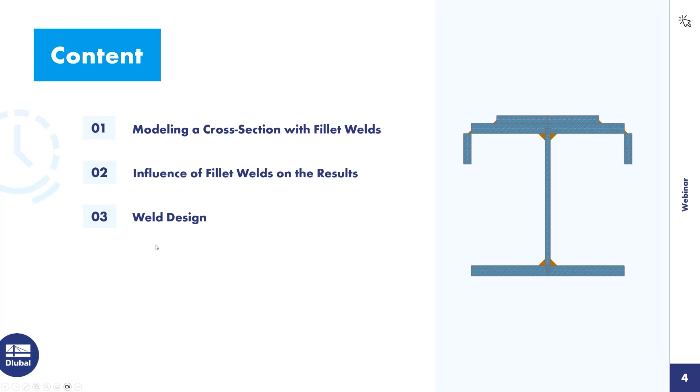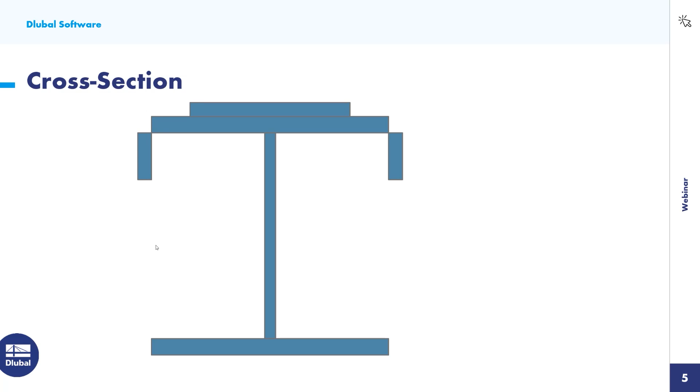The presented I-section featuring a welded reinforcement and welded lips on the top flange will be modeled in RSECTION. During this process, the types of fillet welds available in the program will be introduced. The throat welds are modeled using a standard fillet weld. The connection between the reinforcement plate and the flange is created using a lap fillet weld, while the lips are attached to the flanges via corner fillet welds.

To begin, I create a new file in RSECTION. I name this file example1. Since weld stresses can only be calculated using the analysis method thin-walled analysis, I select this option. For the material, I choose steel S235. This material is already inserted in this file, but if you would need another material, you can choose this from the material library.

I insert the I-section to be modeled from the cross-section library. I use the section type parametric thin-walled since this section type allows me to define the parameters of the cross-section manually. For the welded cross-section, I choose also the manufacturing type welded.

When inserting the cross-section, I disassemble it into its individual components to allow for further editing. To ensure that the force transfer occurs exclusively via the weld and not through adjacent elements, a separation joint must be defined on the welded element. Let me explain this in more detail.

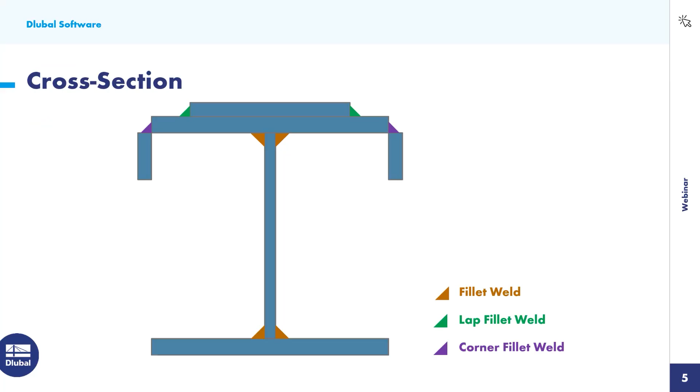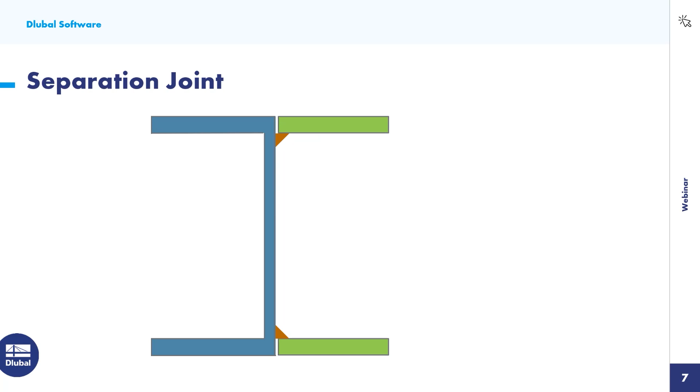In this example, the web is welded to both the top and bottom flanges. In this case, the web is considered the welded element. Therefore, separation joints must be applied at both the beginning and end of the web, in other words, at its connections to the flanges. If, on the other hand, the two right-hand flanges were to be welded to an existing section, the separation joints would need to be defined on the flanges, as they would then be the welded parts. The separation joint is defined directly within the corresponding element.

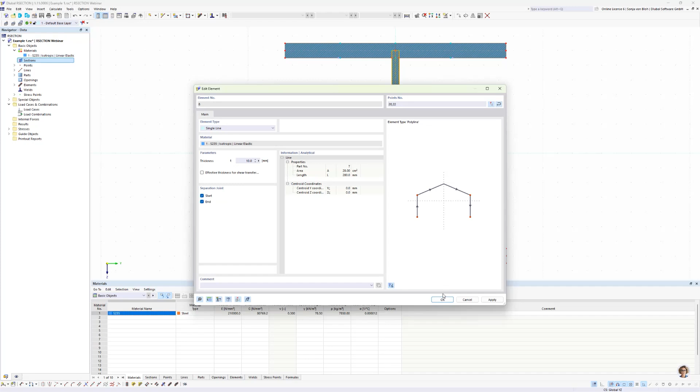In this case, I open the Edit dialog of the web, and here I define the separation joint on start and end of the element. For verification, the separation joint is also shown graphically in the model.

Next, I define the fillet welds. For this, I use the weld type fillet weld. First, I define the throat thickness. This should be 10 millimeters. Then I select the elements to be connected by the welds. These are the upper flanges to the web and the lower flanges to the web.

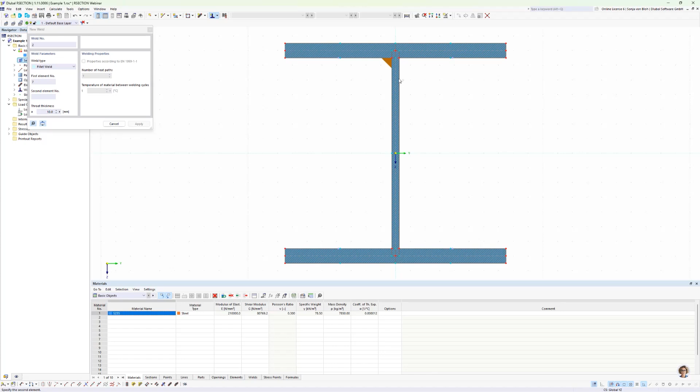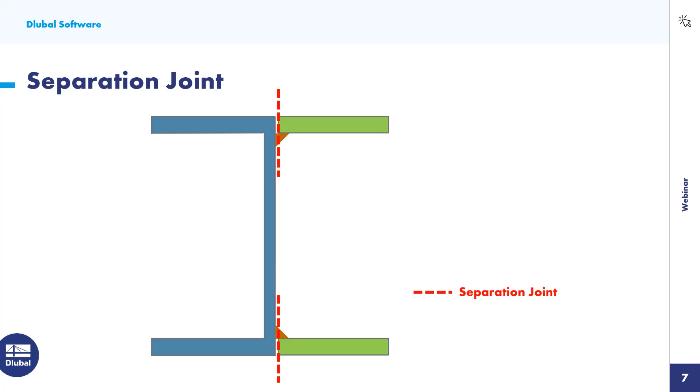The connection between the flange and the web is made via the fillet welds. I would now like to show in detail how these welds are represented. To do this, I examine the connection between the web and the top flange. The previously defined separation joint on the web ensures that there is no direct connection between the web and flange. Force transmission takes place exclusively through the weld.

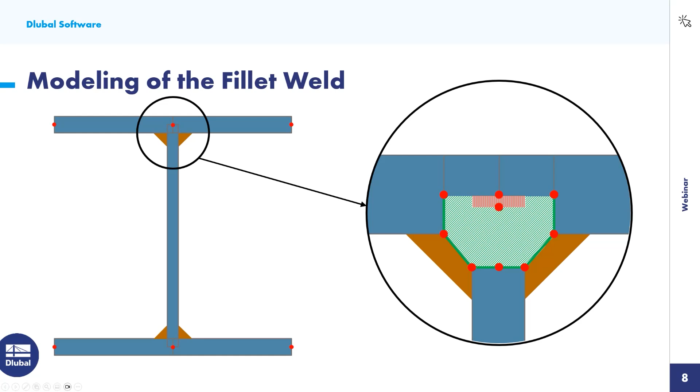For comparison, I create an additional file with identical cross-section but without welds. I name this file example2. I choose here once again the analysis method thin-wall analysis. I use the material S235 and I define the I section with the help of the cross-section library.

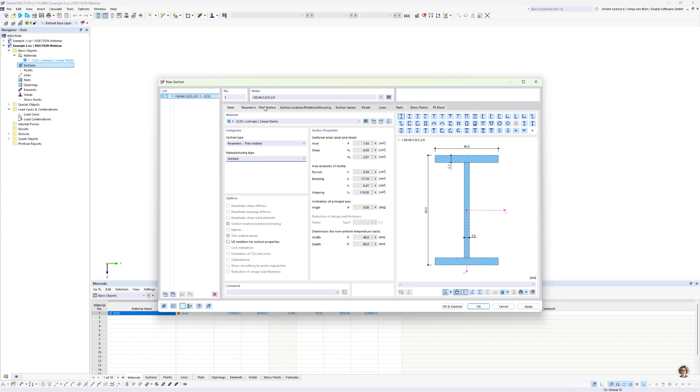Here I choose the section type parametric thin-walled, the manufacturing type welded, and I define the dimensions of the cross-section: height 300 millimeter, width 300 millimeter, thickness of the web 10 millimeter, thickness of the flanges 20 millimeter. I insert the cross-section with OK and explode.

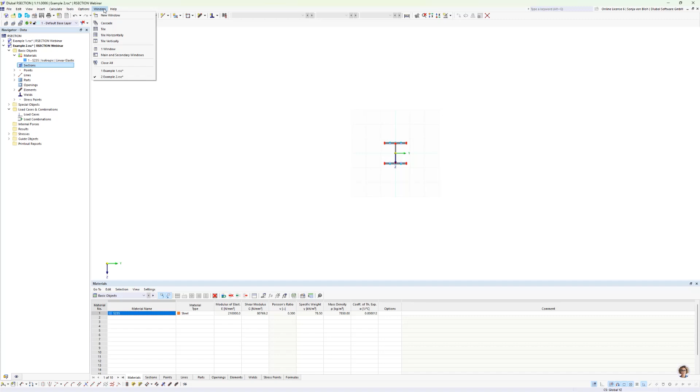To directly compare the cross-section properties and stresses, I display both models side by side, and for this I use this function tile vertically. Then I start the calculation in both files.

As already explained, the torsional constant in the file with weld is higher because of the additionally considered Bredt torsional moment of inertia. Here I have a torsional constant of 195, and in the file without welds I have a torsional constant of 162. I then compare the unit shear stresses due to torsion.

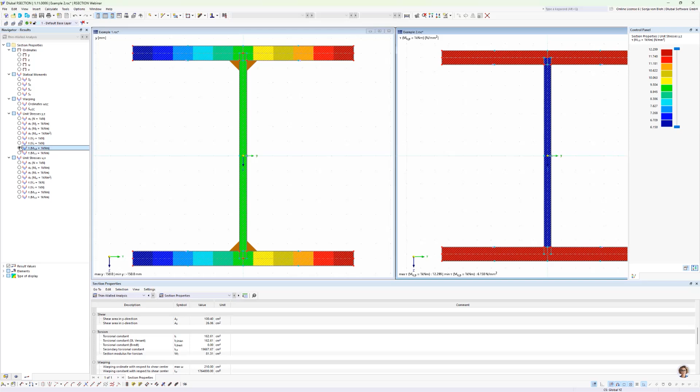For this, I activate the unit shear stresses in both files, and I choose the type of display off, and also in this file. In the region of the closed cell, due to the welds, higher torsional shear stresses are observed in the welded section, while lower stresses occur in the remaining areas of the cross-section.

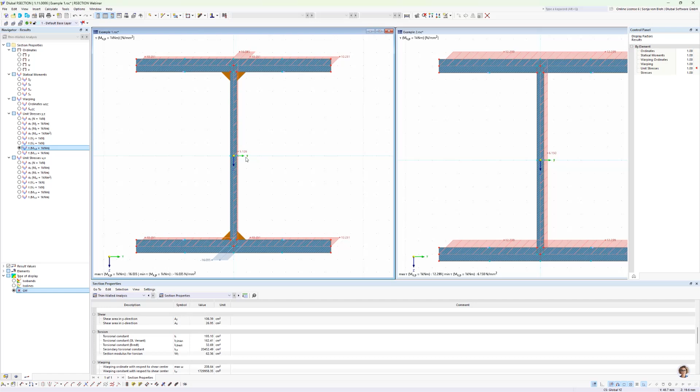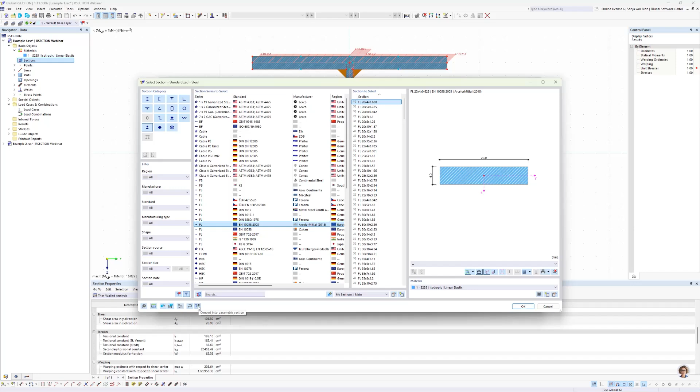To further reinforce the I section, a flat steel bar is welded to the top side of the flange. I select a flat steel profile from the section library. For this, I open the navigator data and insert a new section, a flat bar. I want to define the dimensions manually, and I define a width of 200 millimeter and a height of 50 millimeter.

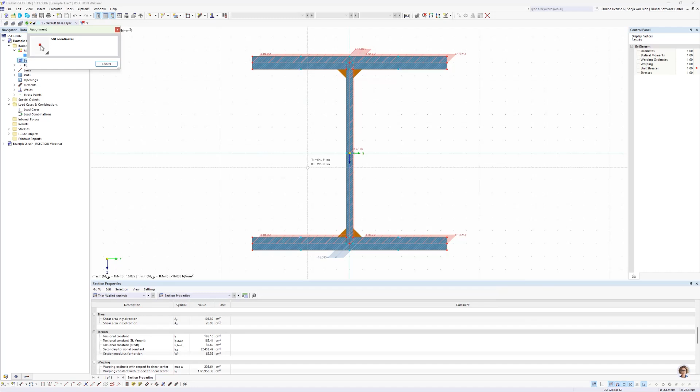In the graphic preview, I set the center of the bottom edge of the flat steel as the reference point. I then select the insertion point in the working window, which corresponds to the center of the top flange. After confirming with OK and explode, the flat steel bar is placed centrally on the top of the flange.

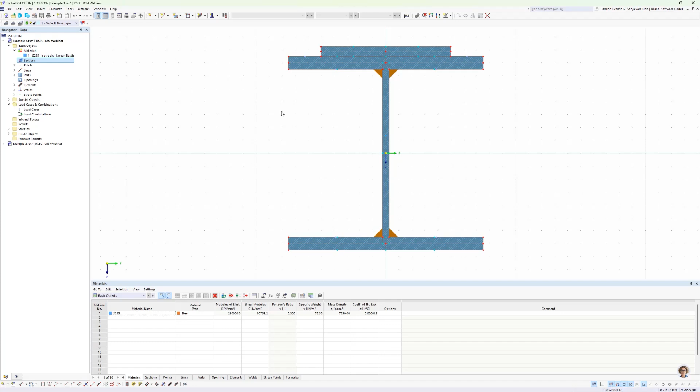The connection between the flange and the reinforcement is made via a lap fillet weld. This type of weld provides a direct connection between both components, making additional connection elements unnecessary. Lap fillet welds are suitable for elements that run parallel to each other and make contact at at least one point. So I open the lap fillet weld dialog, and here I first define the throat thickness of 5 millimeter.

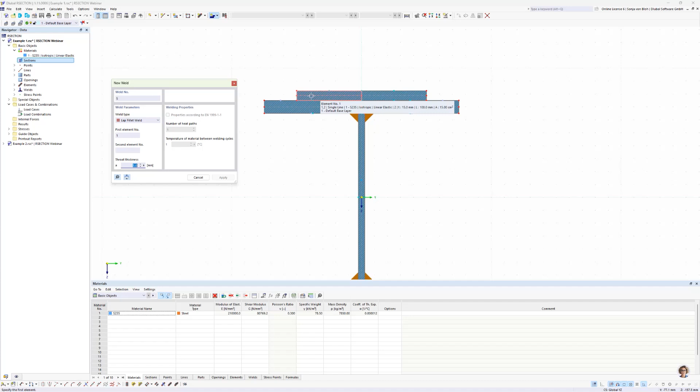The first element to be selected is always the one whose front face the weld will be applied to. And this is this element on the top. As soon as the mouse hovers over the second element, a preview of the weld appears in the working window. Clicking on the second element completes the creation of the welds. On the right-hand side, I do the same.

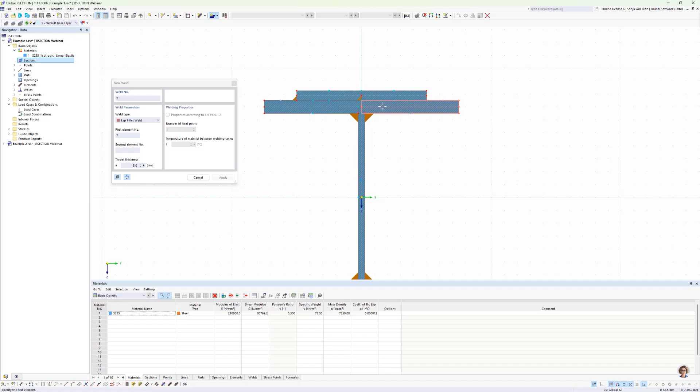But I see here that the weld is not placed as intended. This is due to the graphical input method, where the first weld is automatically placed at the start. Only a second fillet weld on the same element would be generated at the element's end. To correct the weld's position, the orientation of the first element can be reversed. I will do this here in this file. I select reverse element orientation, and now the weld is in the correct location.

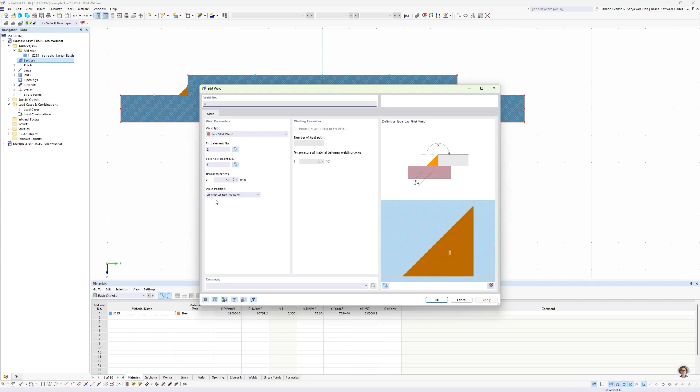You have an alternative way to do this. For this, I undo this action. You also have the possibility to define the position in the weld dialog, and here you can choose the weld position at end of first element.

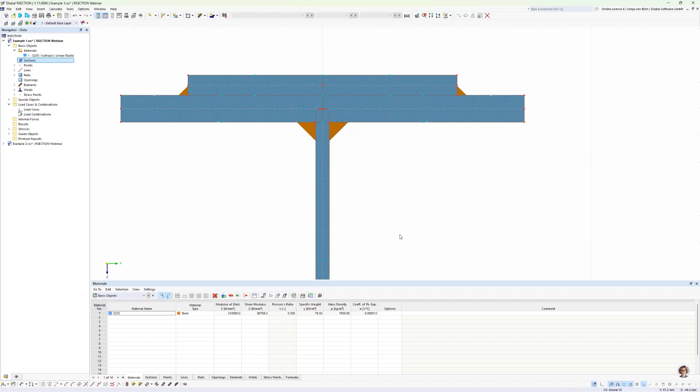To further reinforce the top flange, additional lips are welded to the sides. For this, I select a flat steel profile from the section library. So I open the section library again. I choose here bar sections, convert into parametric section, and then I define here the width. And the width should be 60 millimeter and the height 15 millimeter.

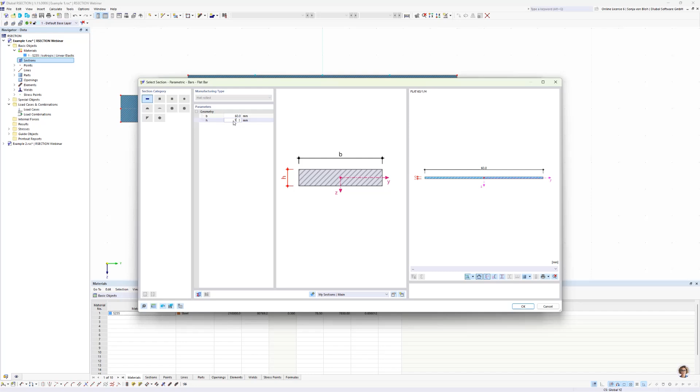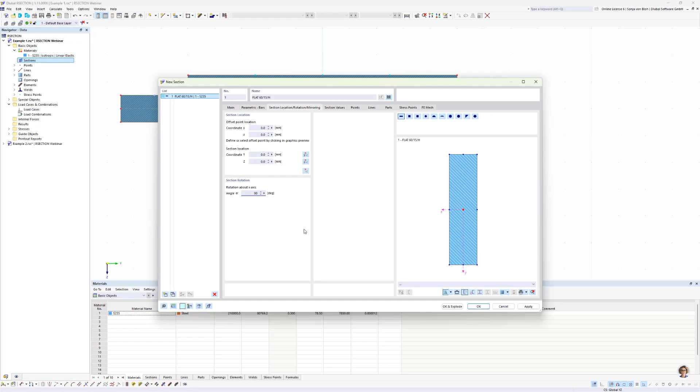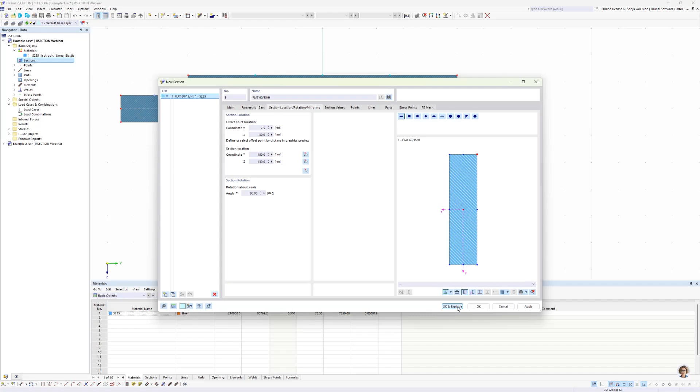I have now to rotate this cross section, and I do this in the step section location rotation mirroring, and I define here the rotation about x-axis, about 90 degrees. In the graphic preview, I set the upper right corner of the profile as the reference point. So I click here on this point with the mouse. The insertion point is then selected as the lower left corner of the top flange in the working window. And the cross section will be inserted with OK and explode.

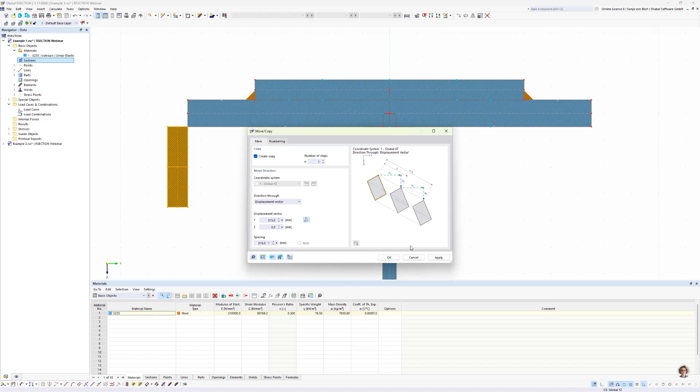The inserted lip is then copied to the right-hand side. To do this, I select the component and then I choose the Move Copy command. In the dialog that opens, I activate the checkbox Create Copy, and then I define the displacement vector and click on OK. The connection of these parts is made directly using a corner fillet weld, meaning no additional connection elements are required. The only requirement is that the elements must touch at least one point.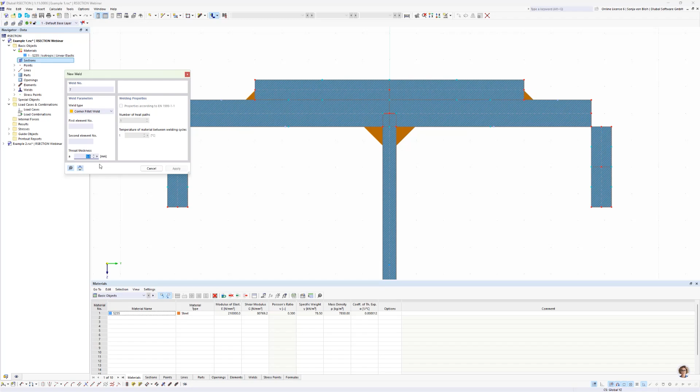So I open here the corner fillet weld dialog. I define a throat thickness of 5 millimeter, and then I select the elements to be connected. The elements are selected one after the other using the mouse. The order of the selection does not matter. So I select here these elements. The welded cross-section is now fully modeled.

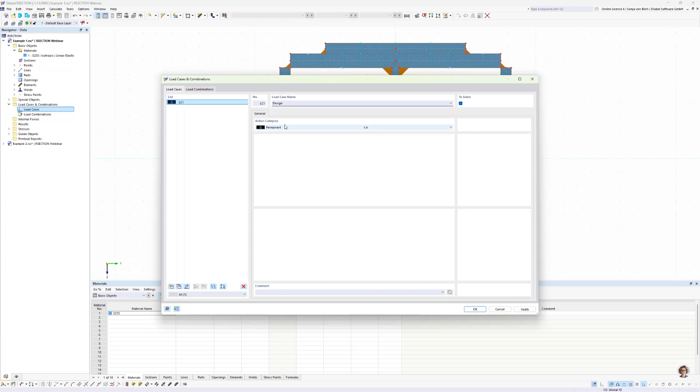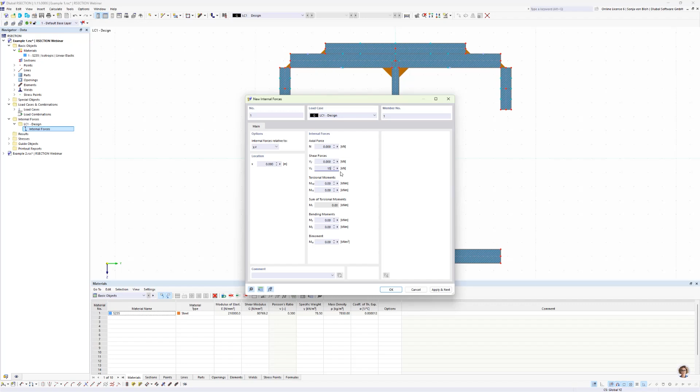The next step is to perform the weld stress checks. For this, a new load case must be defined. So, in the navigator data, I create a new load case and I define the load case name design. Within this load case, I define the relevant internal forces. So I open here in this load case the internal forces dialog, and I specify a shear force of 150 kilonewton.

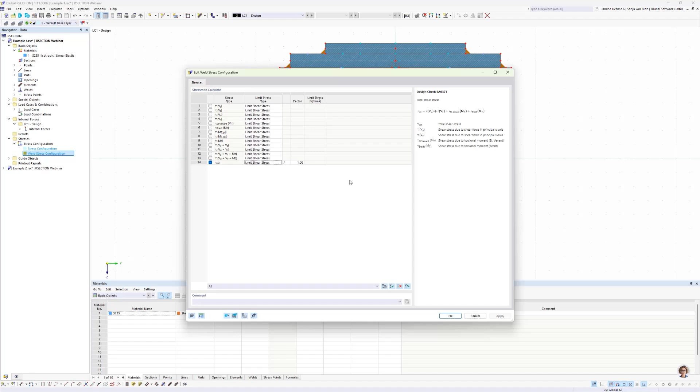The selection of the weld stress components to be calculated is done in the weld stress configuration dialog. You find this dialog via the navigator data, here under stresses, stress configuration, weld stress configuration. Here you can choose the stresses to calculate, and here it's also possible to define the limit stress types. The limit shear stress is calculated automatically, but it's also possible to define the limit shear stress user-defined. I leave the default settings unchanged, so I click here on OK. I then start the calculation.

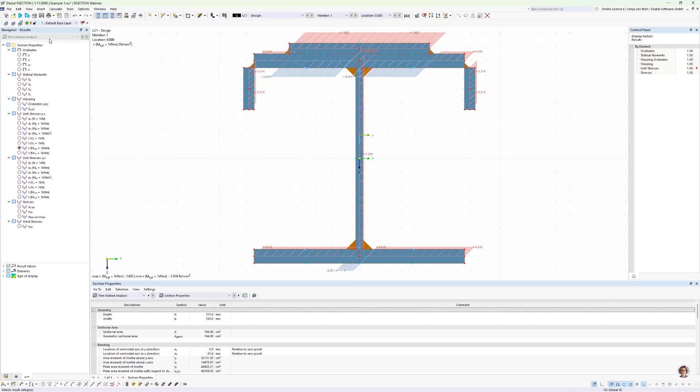The weld stress results are displayed both graphically and in tabular form. The graphical results are located in the navigator results under weld stresses, and here I have to use the type of display isobands, and then you see here in the stresses directly the weld stress values. The tabular results can be found as a subtable under analysis of thin walled structures. So it's here this subtable weld stresses. This table includes the calculated stresses, the allowable limit stresses, and the resulting stress ratio. With that, all steps for modeling the welded cross-section and performing the weld stress design are complete.